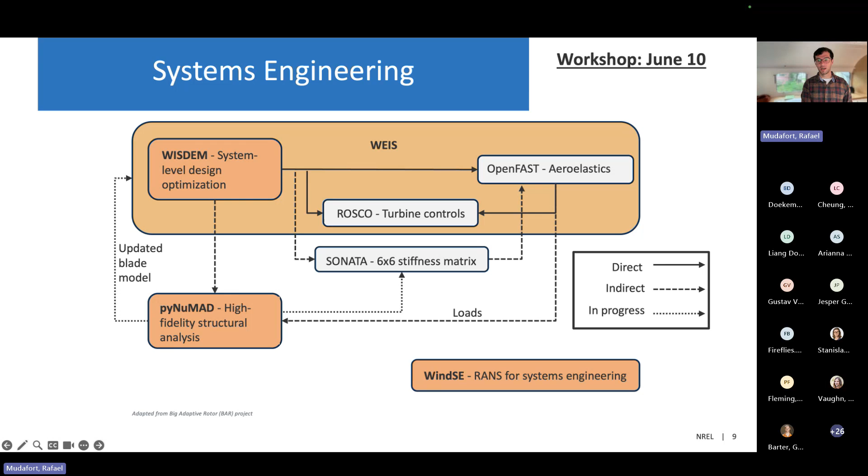WindSE is shown here on the bottom right. It's not yet integrated into this design loop or this workflow. It's a RANS CFD model designed specifically to strike the balance between engineering scale models and flow resolved CFD, and it's specifically tailored to optimization problems. So that's kind of the context in which it lives.

The next collection of software are the wind farm analysis and controls models, and these are mostly related to characterizing and improving the energy yield of a wind farm. These are the topic of the rest of the workshop, so I'll skip through them, but I wanted to point out that they're also a whole grouping within the WETO stack.

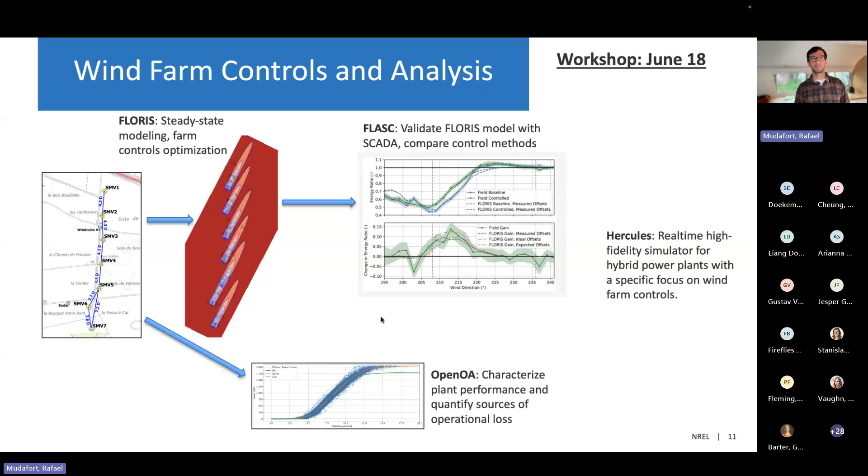The OpenFAST collection of tools are, of course, OpenFAST, along with a set of adjacent tools that enable using OpenFAST effectively. OpenFAST itself is a multi-physics, multi-fidelity whole turbine simulator for the coupled dynamic response of wind turbines. It contains distinct modules for aerodynamics, hydrodynamics, control and servodynamics, and structural dynamics. It also supports modeling a variety of wind turbine architectures, including floating offshore wind turbines. And then there's FAST.Farm, a superset of OpenFAST that contains additional modules to enable full farm modeling, including wind turbine wake interactions.

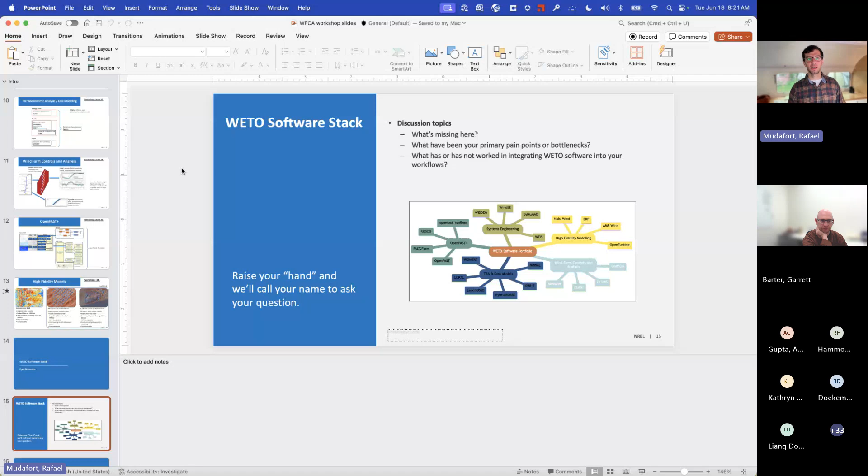Go ahead, Pete. So my main confusion with the whole stack has been, what do I choose for a given scenario? What I care about is unsteady modeling of wake steering, for example. I see FAST.Farm could potentially help me there, WindSE, potentially the very high fidelity LES stuff, but I probably don't want to get into that because I'm doing engineering work right now. Do you have any advice for that sort of decision?

So specifically, I think FAST.Farm, for a higher fidelity tool than FLORIS, is what we've looked at as well. That's kind of where FAST.Farm sits. But as far as making that decision more generally, it's a good point. As I understand it, you're trying to navigate the varying fidelities in the models to answer a slightly different question than where you're at now. If you're doing farm level control design and want to take the next step, how do you navigate this map of models to pinpoint what you can use?

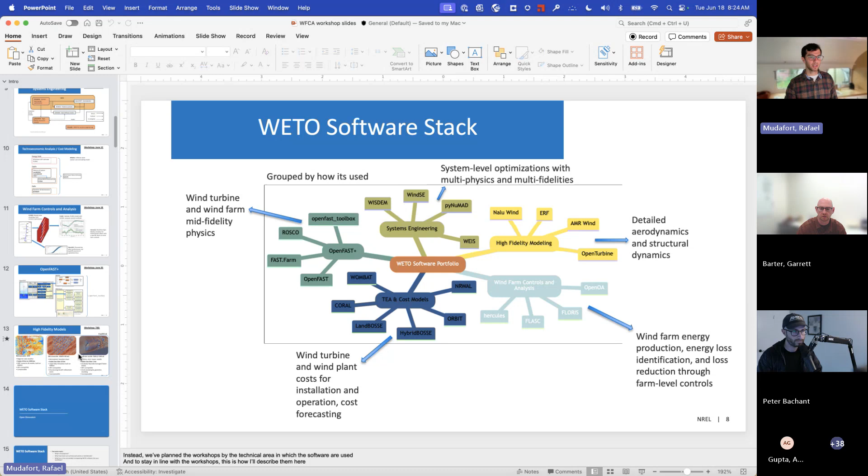Yeah, that sounds about right. Like an index of everything, or a roadmap. Where do I enter the ecosystem? Yeah, that's a good point, and I don't think we have something like that just yet. That's what I'm trying to go for with these few slides, but we need one level up in the hierarchy, some mapping instead of words here. Would you say that's accurate? Yeah, I think that would be helpful. Okay, thanks for the feedback, I appreciate that.

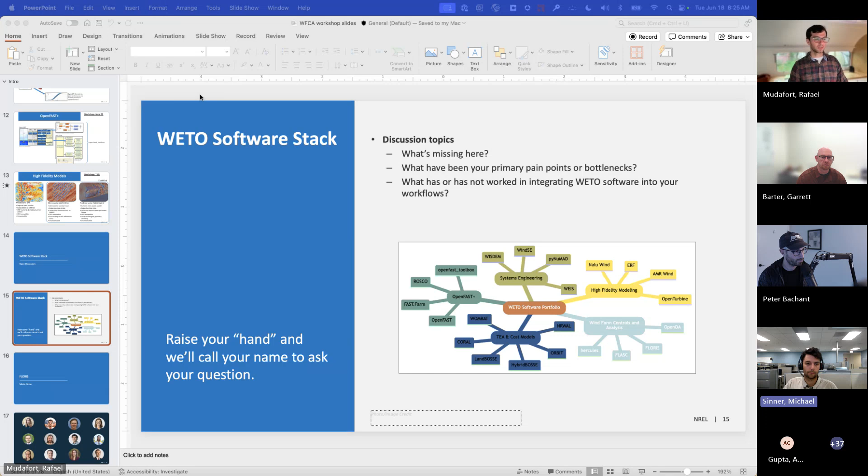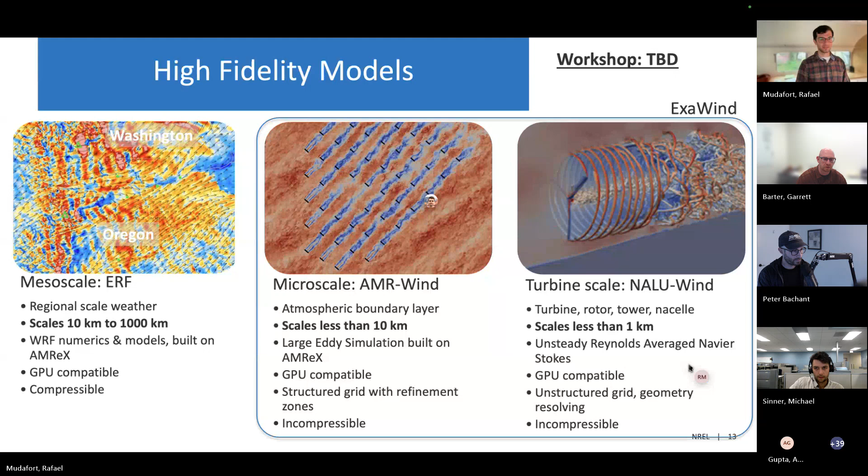All right, if there's any other questions, bring them up now. Otherwise, we can move on to the next section. Great, thanks, Pete. Misha, it seems like Teams is not working out today, so you'll have to share your screen directly. I can still take control, so if you go into presenter view I can try taking control. Did you get a request to give me control? Yep, you got it. I think it's going to work. Sorry if it's a bit laggy. There we go.

So hi everyone, I'm Misha. I am part of the wind farm controls group here at NREL, and I'll be talking about FLORIS, which is our low fidelity, analytic engineering wake model for wind turbine wakes.

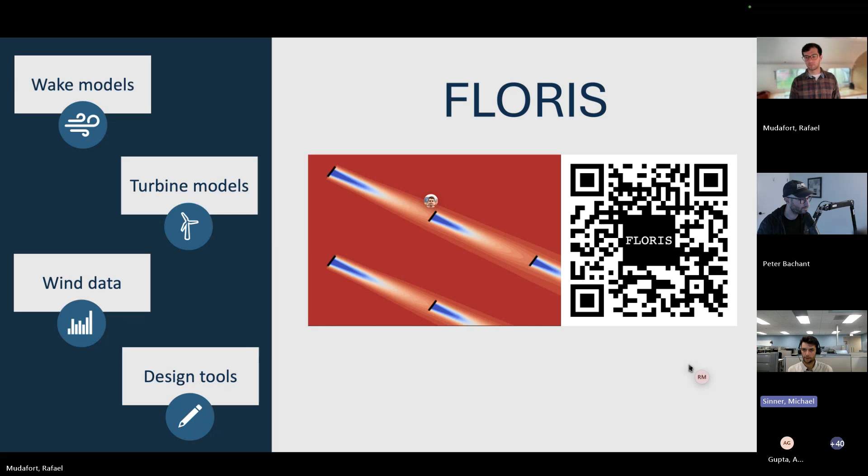So yeah, FLORIS is our engineering wake model for looking at wake interactions within a wind farm, particularly when you have multiple turbines and turbines operating in each other's wakes. It's a collection of wake models, turbine models, which are modeled as actuator disks, a set of tools for handling how you want to run your inflows to the wake model, and a set of design tools for optimizing your wind plant's performance given the wakes within the wind farm.

So the wake models, I should mention FLORIS, the S is for steady state. So it's a steady state wake model, no dynamics included, but just the time averaged or steady state behavior of wakes within a wind farm. That allows us to implement very simple analytical models that can be solved very quickly. So you can run hundreds of thousands of wake model calculations in a second.

And we have a library of different wake models that have been proposed in the literature and that we use in-house here, that I won't go through in detail, but just to say that there's many different characterizations of the wakes which have different strengths and weaknesses in terms of modeling real situations.

Turbines are modeled as actuator disks, so essentially a power and a thrust curve as a function of wind speed. But we've recently released FLORIS 4.0, and in FLORIS 4, we've greatly expanded our capabilities for turbine modeling so that we can model different types of operations.

So yaw misalignment, which was already available in previous versions of FLORIS, but now also turbine derating, peak shaving, the change to the power and thrust coefficients due to things like active wake mixing, shut off and curtailment and many other things like that we're now in development for. But yeah, we've opened the door for much more advanced operation modeling of turbines now with FLORIS 4.

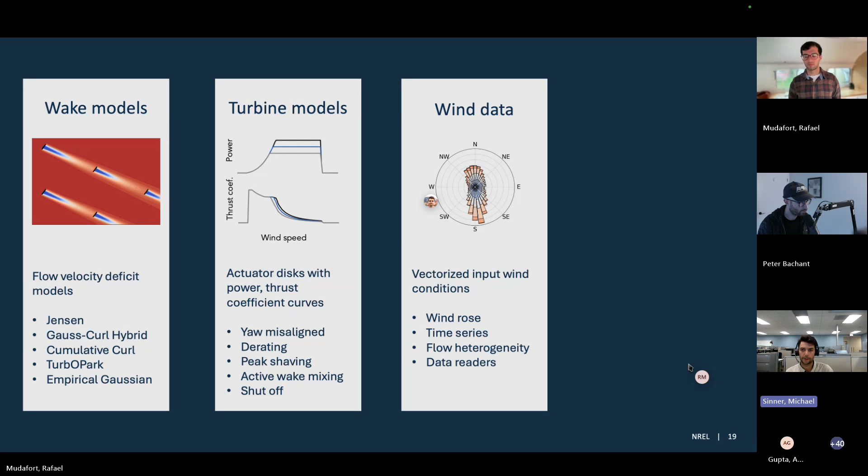But we have handling for specifying your inflows as a wind rose, as a series of inputs that you want to run, as though maybe you had gotten them from a time series measurement. We can handle heterogeneity in the inflow, and we're also building out capability for reading in inflow data from common formats such as WRG files and other formats that you might see out there for handling wind data.

And finally, I'll mention also our design tools. So these are centered around two main optimization routines. One for optimizing the yaw angles of the wind turbines within a wind farm to find optimal yaw angles that steer the wakes away from downstream turbines and maximize power capture across the entire farm. And layout optimization, which moves the turbines within the wind farm boundary to again mitigate wakes given the wind rose and the frequency of different wind direction and wind speed conditions.

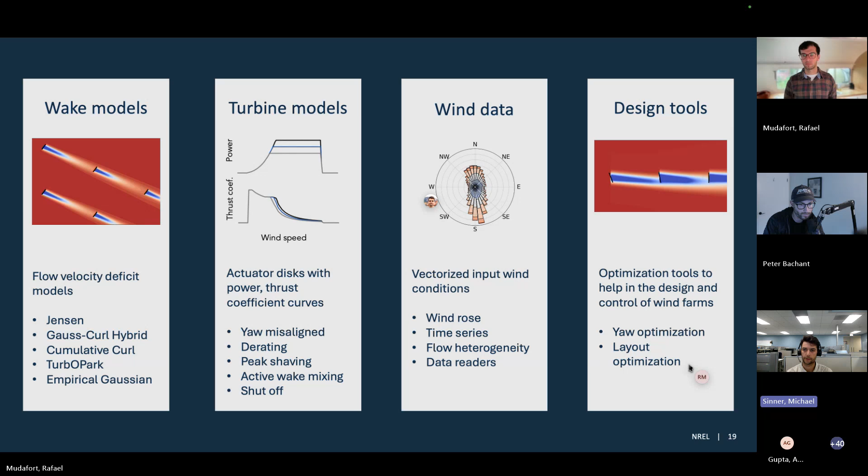Then a few lines to specify an inflow condition. This is using the time series data handling object, but essentially here I'm randomly assigning 100 wind directions, wind speeds, and turbulence intensities to go in a pairwise calculation. So there are 100 conditions to run. Next line just sets that time series object onto the FLORIS model to prepare to run.

And then the run call, this is the one that does the work, the one that actually computes all the wakes and the effective velocities at each turbine. And then a couple of lines to extract the outputs that we might be interested in. So turbine and farm powers in this case. So again, it's relatively simple to set up this Python script and run a simple calculation with FLORIS. And I haven't exactly timed this script, but this will run in less than a second for these 100 conditions on my laptop.

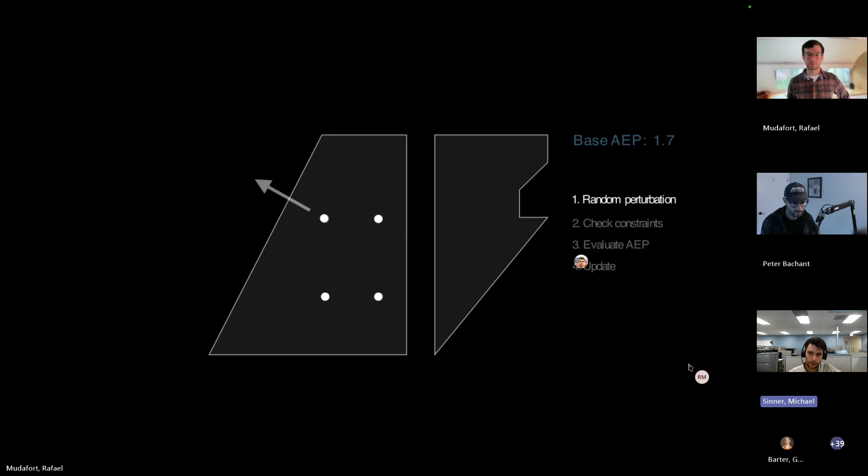Okay, so for those who have seen FLORIS before and maybe that was all a little bit of things you'd seen before, here's something new. This is now released in FLORIS 4.1. This is a layout optimization that we do by randomly searching the domain. This is maybe not as efficient as gradient-based optimization, but allows us to handle complexities like disparate boundaries with maybe shipping channels between them that make it difficult for gradient-based solvers to handle.

And basically, what we do here is we perturb turbines randomly. We check whether they still satisfy constraints, so they're still within bounds and they still satisfy minimum distance constraints. If they do, we check whether they improve AEP. And if they do improve AEP as well, then we set that as the new candidate optimum and can continue our search. To speed this up, we also have some handling for a genetic algorithm, so we can run this in parallel.

And the idea with this is that it's very robust to complex conditions, robust to the initial condition that you lay out the turbines with. And so you can reasonably quickly get a close to optimal layout without having to think too hard about fine-tuning gradient-based parameters and things like that. So again, that's in the very recently released FLORIS 4.1, and there's examples there too.

Okay, so this workshop shouldn't be the end of your discussion with us on FLORIS. There are many ways to be involved with FLORIS. First of all, we've made a big effort to put good docstrings all throughout FLORIS. So you'll find a description of what each function does, at least at the top level for the user interface. But also a pretty rich set of examples on the GitHub repository. There's about 10 basic examples, and then 30 or 40 more in-depth examples on there. So do take a good look through the examples.

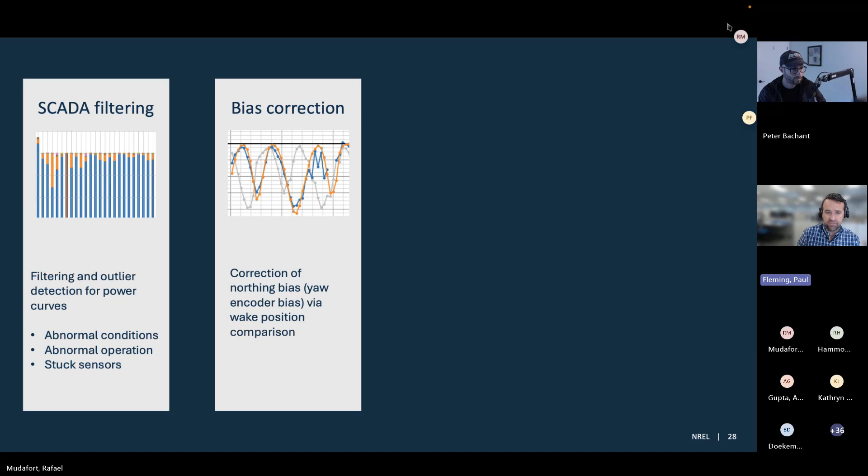So like I said, one important package of tools in FLASC is SCADA filtering. These include filtering for abnormal conditions and stuck sensors. We also include power curve filtering and things like that. Secondly is bias correction. We'll get into this more in the later slides, but using engineering models to help identify steady biases in signals like wind direction measurements.

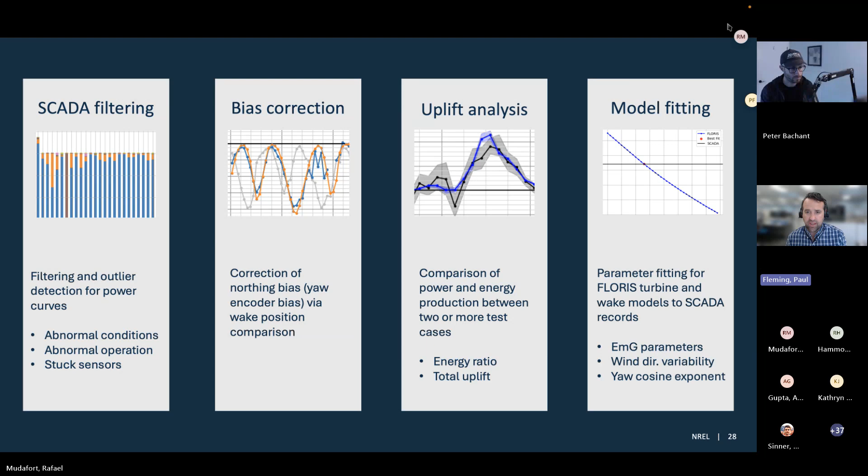Uplift analysis: comparing engineering models and SCADA data when you're running a type of toggle test and trying to see the benefit of a certain controller application. And then finally, model fitting, so using SCADA data to calibrate engineering models in FLORIS.

So FLASC includes really two sets of examples when you download it. One is based on artificially generated data, and a second set uses the SMARTEOLE wake steering field campaign. This is a data set made public by ENGIE Green, and is the data set that comes from this paper, which was a test of wake steering at an ENGIE site, a collaboration between NREL and ENGIE in the SMARTEOLE campaign.

And the examples work through accessing and cleaning the data, preparing a FLORIS model of the site, downloading the data from the Zenodo location where they're available for free, and setting it up in FLASC structures. Then it goes through the analysis of the data in a way that matches what was done in that paper, so you can see how we produce those analysis results.

And then finally, some new things, model tuning of engineering models to the data sets. And so to demonstrate FLASC in this meeting, I was going to go through this set of examples quickly to show some of the usage of FLASC and some of the capabilities.

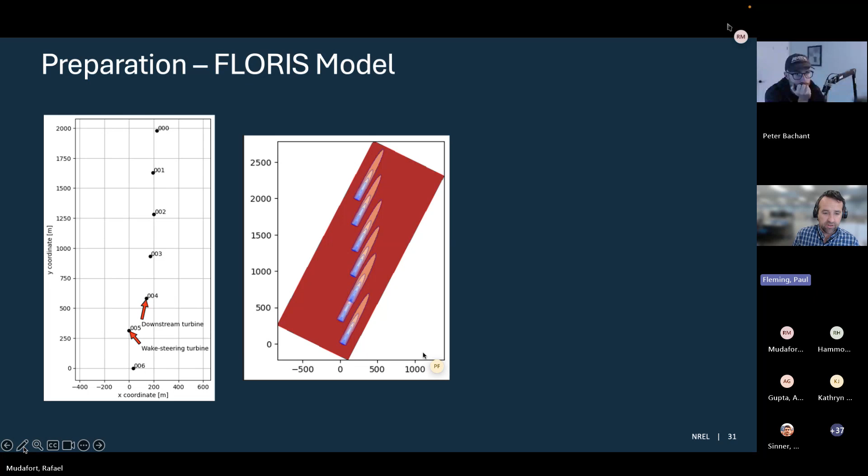Secondly, there are examples for downloading the data and then setting it up. FLASC uses a pandas data frame as one of its main structures for holding data, and it expects you to assemble the data into that kind of frame. So the script goes through the process of downloading the data and then converting the data from arbitrary names of channels to the ones that FLASC will be expecting.

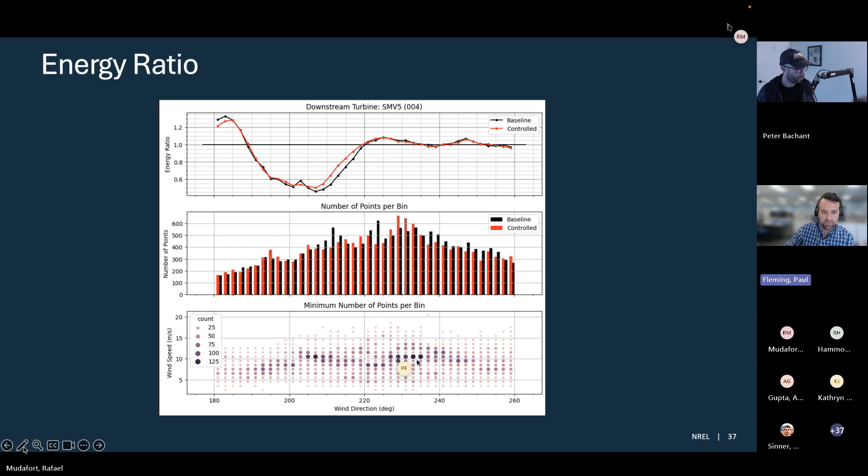Uplift calculation is just a small change in how we analyze the same data. So it uses the same structures that we already set up, but now we're going to ask to plot the uplift from baseline to controlled. We're going to call this uplift.

And here, instead of just doing the energy ratio once, we're telling it to use a block bootstrapping of 40 times. So resampling the data 40 times according to time blocks in order that we can produce these sorts of uncertainty bands around the analysis. Here we're selecting the sort of default 90% confidence intervals.

We can also make comparisons with FLORIS using these same methods by regenerating the data in FLORIS from the SCADA data. So supplying the reference wind speeds and directions, and then calculating the expected power of each turbine with FLORIS. We can produce matching data frames that can then go through the same process.

And now we'll build an energy ratio input that includes both the baseline and controlled SCADA data, but also the baseline and controlled FLORIS data. And now we can make energy ratios of all these things together. So the baseline and controlled SCADA data, baseline and controlled FLORIS.

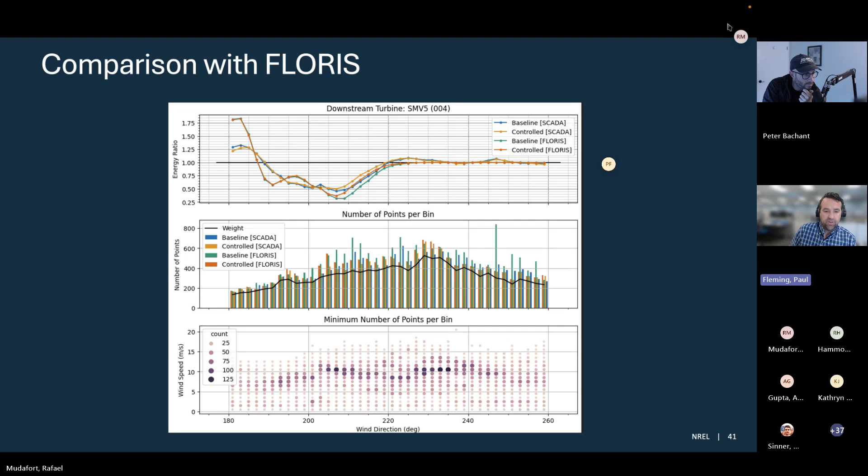And finally, we have some methods for computing the total uplift over a given region. So you specify the region and you ask for like a single number instead of a visualization of calculated uplift. Also, you can specify number of bootstraps to do to calculate uncertainty intervals over that uplift. And so in this case, we would get an output like this. Calculated percentage gain over these regions from the SCADA data and from FLORIS. And we could have also put some uncertainty bands in these printouts.

So FLASC is a bit younger than FLORIS, so a lot of these things are not as completely robust as FLORIS, but in general, we try to follow the same WETO software best practices that Raphael has put together. So we use normal Python docstrings within the code as one place to learn the code. We try to follow this best practice.

Secondly, like I said, we ship with two sets of examples. One set related to artificially generated data to make particular points, and then this set of examples using real data. We have online documentation from GitHub pages built into the repository. And finally, like FLORIS, at the GitHub page, we have places for questions and answers in the discussions.

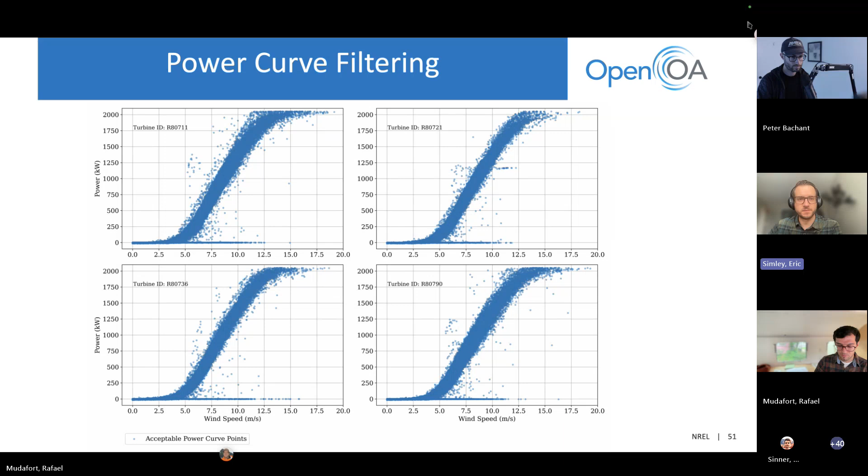For the rest of the presentation, I'll focus on estimating long-term AEP from operational data. This was the first method developed for OpenOA, the one that's seen the most development effort, but most analysis methods run in a similar way to what I'm showing here.

So we'll create our Monte Carlo AEP object. The first argument is the plant data object that contains all of our operational data, called project. Then we specify different analysis parameters: which reanalysis products we're using, the time resolution (monthly in this case), and the regression model we'll use, linear regression in this case.

We then use the linear regression model, applying it to our long-term historical period of reanalysis data, to estimate the long-term AEP of the wind plant.

We'll run the simulation and specify the number of simulations, which is the number of Monte Carlo iterations, where we randomly sample different parameter values and quantify the uncertainty in our AEP estimates.

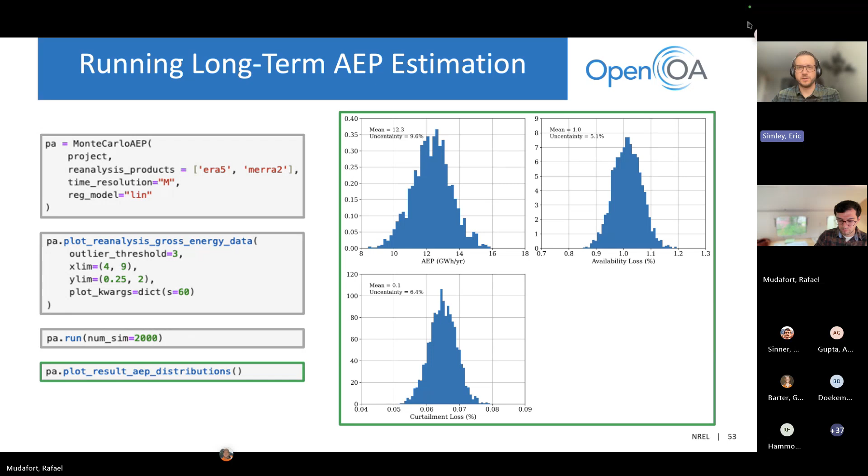Then plotting the resulting AEP distributions. In this case, we're showing the distribution of AEP on the top left, and then availability losses and curtailment losses. From these distributions, based on the different Monte Carlo iterations, we can quantify uncertainty in our long-term AEP.

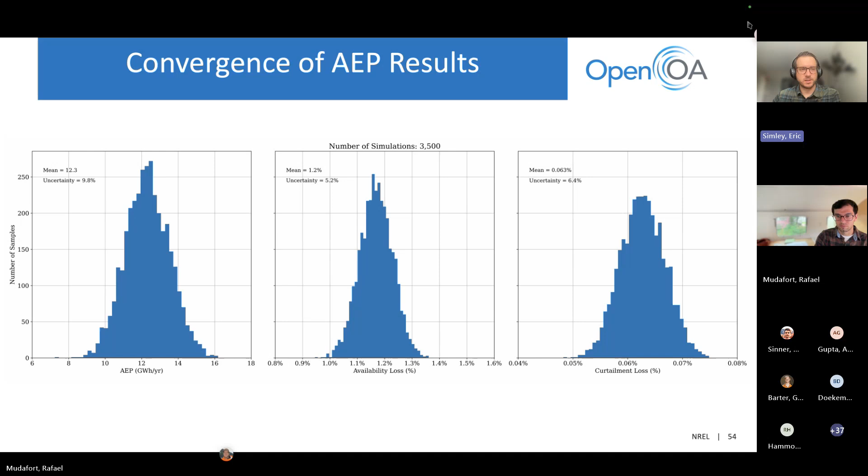This shows how these distributions evolve as we run more Monte Carlo iterations. In this case, after about 1,000 Monte Carlo iterations, the expected AEP, losses, and uncertainty start to converge.

Now showing distributions of different variables or analysis parameters used to estimate long-term AEP. I won't talk about all of these, but these are values that affect what the resulting AEP is, and each iteration will get a new value for each of these variables.

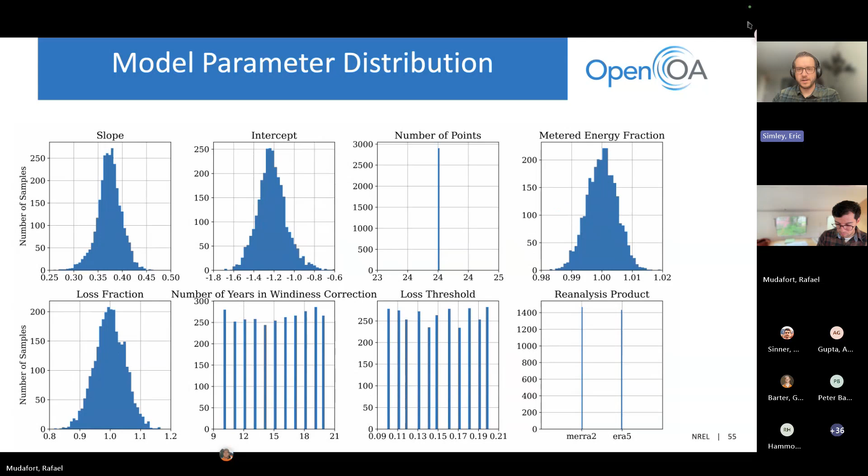Metered energy fraction and loss fraction are basically noise that we add to the revenue meter and loss measurements to simulate uncertainty in those measurements. There's also the number of years of reanalysis data used for the long-term correction, and then reanalysis products—we'll either use MERRA2 or ERA5 to quantify uncertainty in the wind resource available to the wind plant.

So the software development roadmap: the DOE-funded WP3 benchmark project that's been supporting OpenOA since 2018 is actually ending this year, so we'll be looking for new projects to support the code. But in the meantime, we plan to maintain the code, and I think this is a good opportunity to collaborate.

With researchers and industry to keep developing new features. In the near term this year, we're going to make some improvements to the wake loss method, add hourly reanalysis downloading, and continue outreach and promotion.

OpenOA was used as part of a WeDoWind challenge. It's an organization that hosts wind energy data analysis challenges where the community can submit their contributions. It was used as part of a yaw misalignment challenge for that.

Long term, we'd like to expand the analysis methods to meet industry needs, incorporate new data sources beyond CSV files and data frames, perform validation studies for the methods, and really expand the adoption of OpenOA as a third-party validation tool by improving usability and doing these validation studies.

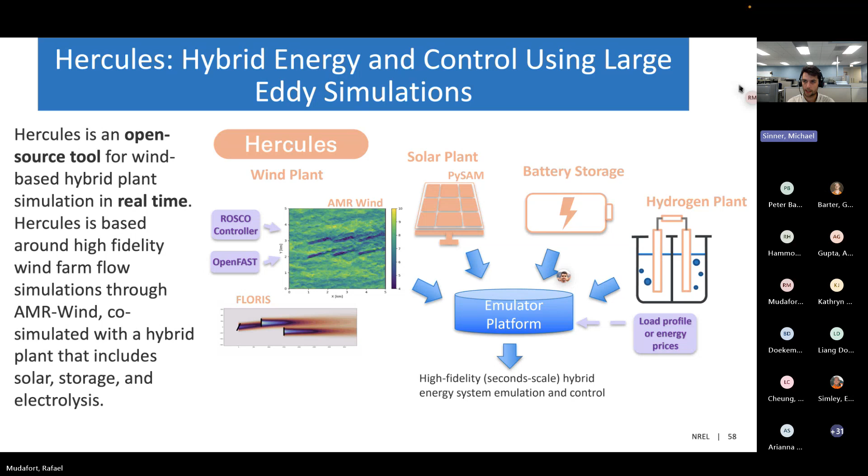To go along with Hercules, we also have the Wind-Hybrid Open Controller, or WHOC. This is a separate repository that contains a library of controllers for wind plants and wind-based hybrid plants to implement real-time controls such as wake steering, active power control for power reference tracking, etc. It also has simplified controllers that manage battery power production and solar power production.

The idea here is that we can have a hierarchical architecture that lives inside WHOC, so that we can have operational controllers that operate different assets within your hybrid power plant, or purely your wind plant if that's all you're interested in, and then also have supervisory high-level controllers that provide set points to those operational controllers so we can manage your entire hybrid power plant as a single unit.

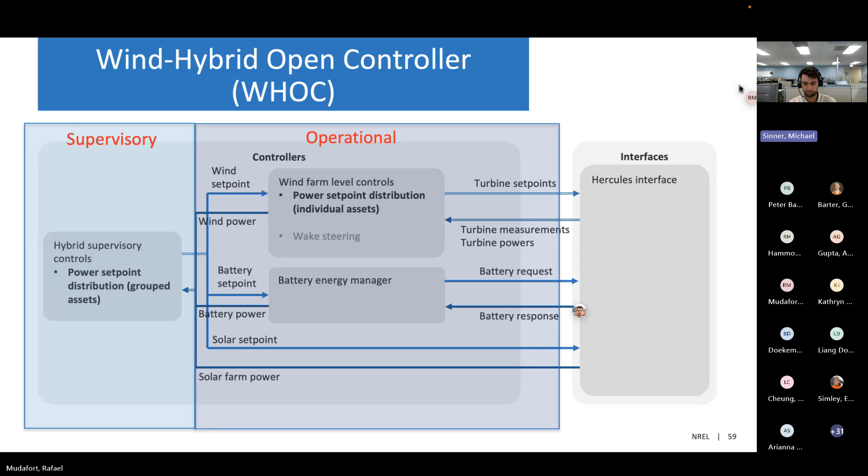The way that Hercules runs is similar in feel to some of our other codes, but because it's managing different simulators, the way that we launch it is through a bash script from the command line. The Hercules component itself takes an input file that specifies the different assets that you want to run in your hybrid power plant.

We'll point to the AMR Wind input file if you're running AMR Wind for high fidelity wind plant simulations. We'll set the battery size, the solar size, things like that, all within this Hercules input YAML. If you're familiar with YAMLs and their relation to Python dictionaries, the structure of this will be pretty familiar to you, and it's pretty human readable. I won't go into too much detail here, but just to point out that Hercules takes in its input as a YAML.

Next, we have a recording that Jen made working through the Hercules workflow. So start with this bash script - this is what will actually be called to run Hercules. Hercules runs using HELICS as a message passing interface, a tool for passing messages around different processes that are running different portions of the simulation.

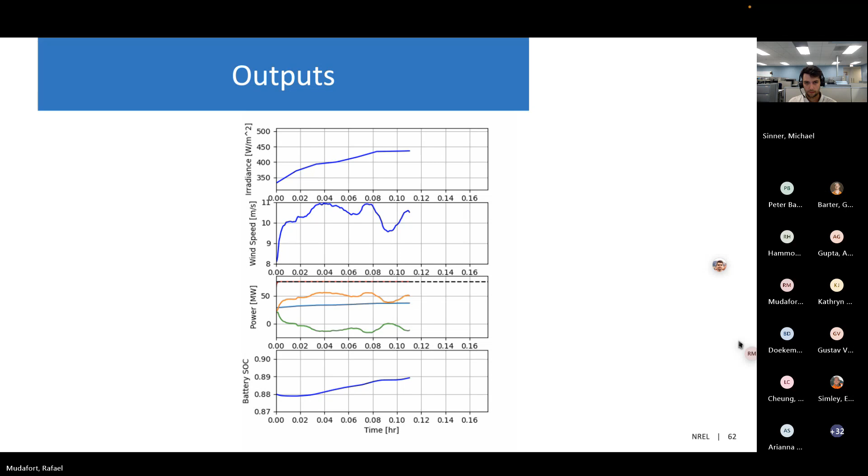So like I said, Hercules and WHOC are quite new for us. These are in their initial phase where we're still exploring what capabilities the community is interested in, how we should be developing these, and what fidelity people are interested in.

We're working to build out the control side in WHOC, in collaboration with Pacific Northwest National Lab, working on generating good inflow conditions that people can run without having to think too hard about what conditions you need to set up, especially with AMR-Wind, which can be a heavy computational lift.

Also building out connections with other parts of the WETO ecosystem, especially the ROSCO turbine level controller, so that we can run farm level controls with WHOC but let ROSCO handle the turbine level operation.

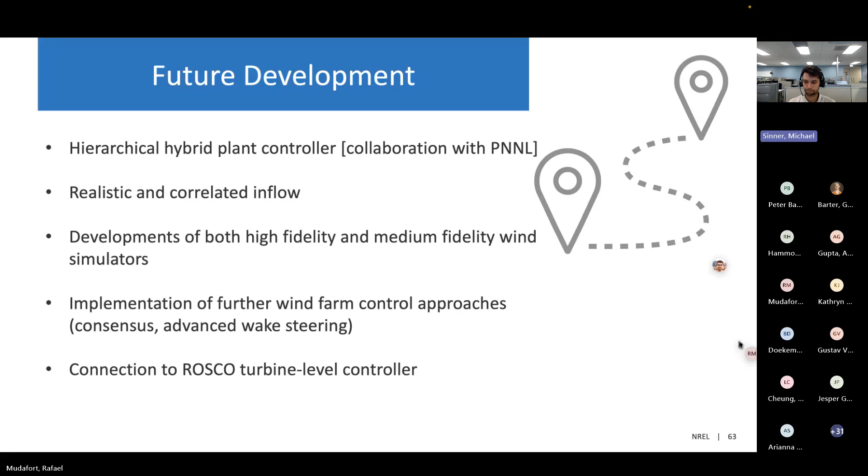Okay Raf, I think that's me. I want to stop here and give it back to you.

Someone in a previous workshop had proposed that something like the NREL forums, which historically have been mostly tailored to OpenFAST and that collection of tools, could be a worthwhile thing to start leveraging more broadly. I think we're maybe hearing that here as well. So thanks for the feedback there.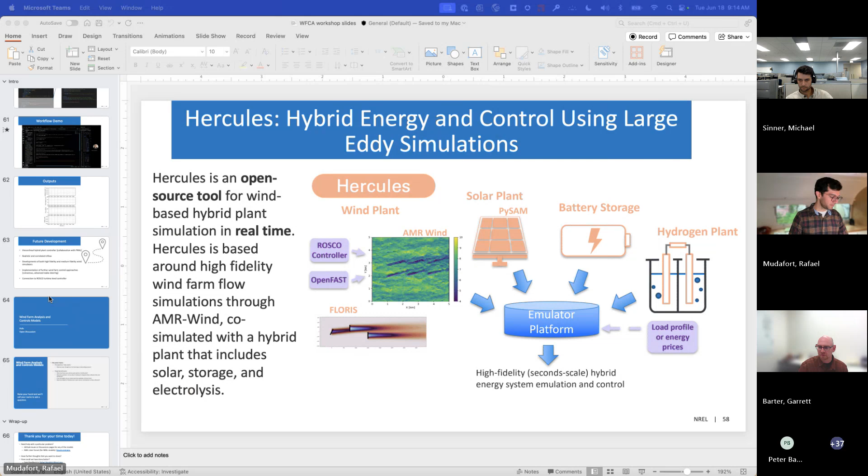Okay, now I just want to open up the floor. Similar to the previous round of open discussion, considering this group of tools, the wind farm controls and analysis software, I'm curious to hear what's working, what isn't, what are your thoughts on the learning or onboarding process, and how well do you understand these tools. I know it's hard to identify what you don't know, but if you have suggestions on what's missing as far as capability or the way we talk about these tools, we'd really like to know. So what questions or feedback do you have regarding these collections of tools?

To piggyback on, oh yeah, go ahead. Apurva, go ahead.

Hi yeah, so I would be a new or prospective user. I think what was discussed in the previous segment about having a starting point, and a classification of what these different tools are, where they lie in their own specific bins, and where one could start and navigate through. I think that overarching theme of having a roadmap for anyone, whether a new user or even an experienced one, would be really helpful. For some of the models, different models can do many things, but then how do I choose between them?